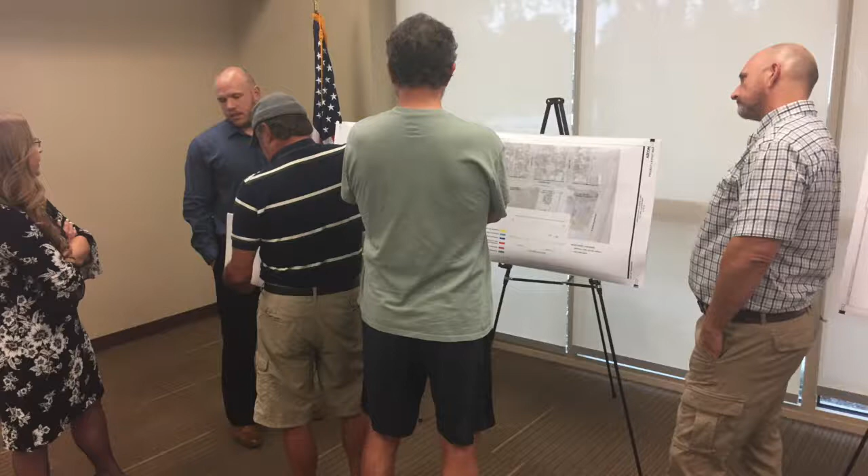So the first one is Tehachapi Boulevard. We're calling it the Tehachapi Boulevard ADA Reconstruction Project. I will tell you guys, grant writing, I've done a lot of grant writing for the city of Tehachapi in the last 14 years, is all about telling a story, and telling an effective, truthful story about what a situation is.

As you guys know, we just built the bike path here on the north side of Tehachapi Boulevard. We've done all kinds of public street improvements up to Hayes using ATP, or funds very similar to ATP, and we've also done Snyder over to Dennison now. But this one piece here from Hayes to Snyder has been missing, and it's pretty beat up.

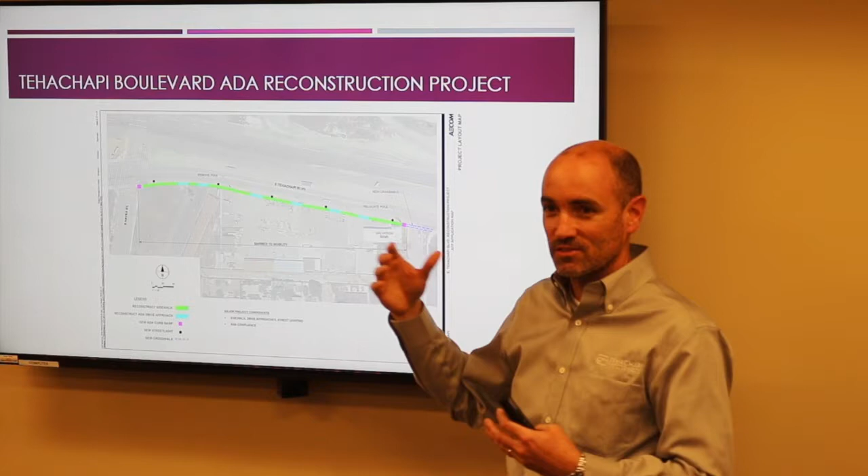There's a lot of power poles and different features that prohibit somebody in a wheelchair from making access. It just so happens that our number one location that receives a lot of pedestrian and disabled visitors, the Salvation Army, is right in this stretch. There isn't even a handicap ramp here on the corner, and that's the target of this project.

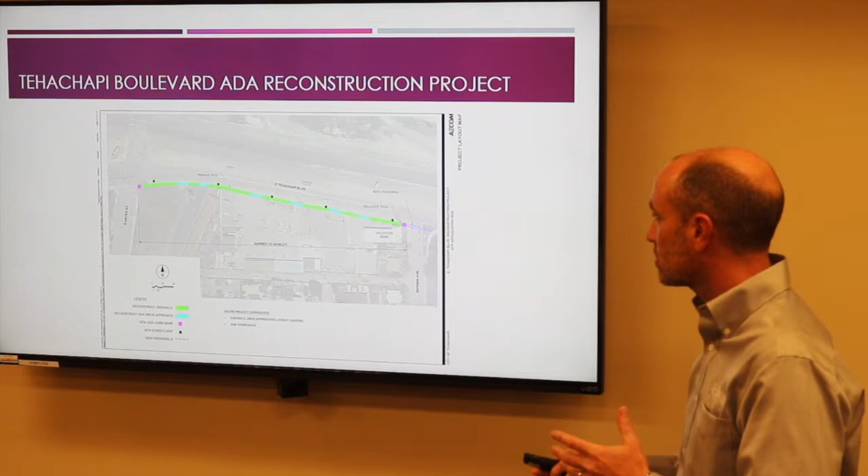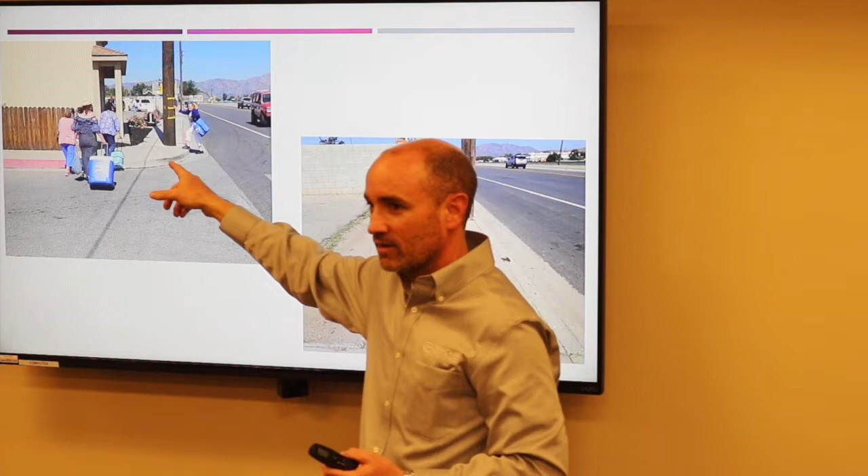And here are a couple of photos for you. These are grant writing gold right here, because they illustrate our point, and pictures do so much better than all the words we can write about it. A person of limited mobility who's literally having to lean on a telephone pole to get up the curb, or people rolling boxes who are going to have to pick those up and may not be capable of picking them up.

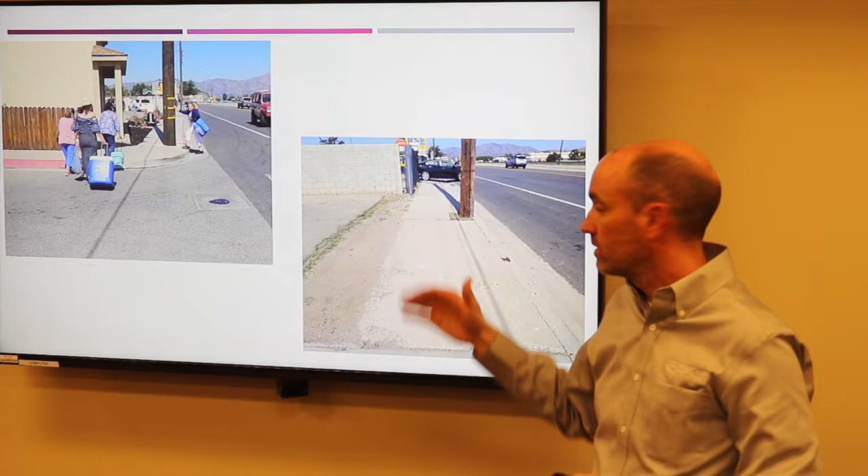Sections where if you're in a wheelchair, this is pretty difficult to navigate, or if you have low vision, this would be difficult to navigate, in addition to it being in pretty poor quality.

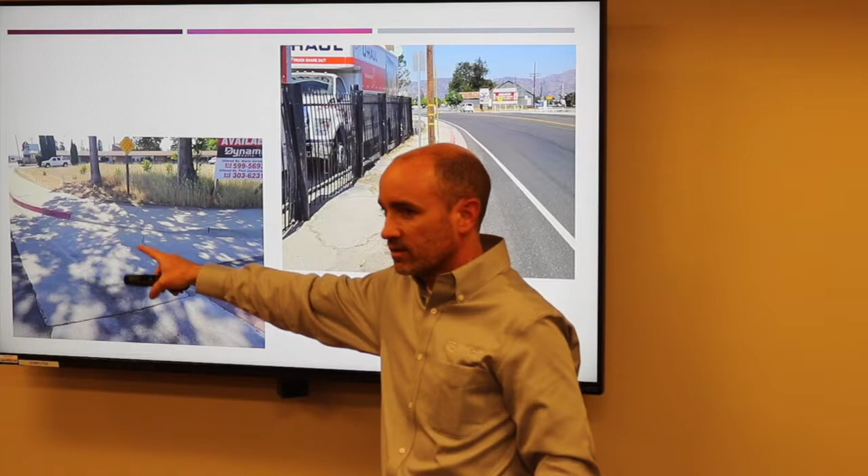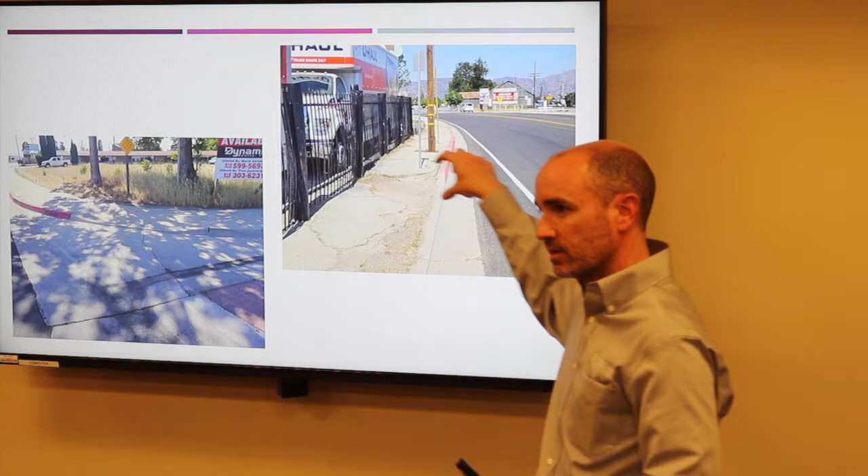Yeah, real poor quality. This ramp isn't even close to compliant. I know it's a ramp, but it doesn't meet current federal code. This kind of stuff, even this, is not compliant anymore. So all that kind of standard driveway is no longer compliant. That's why when you see us build a new driveway, we build sidewalk behind it, because that's required to keep it compliant.

So this is a great project in our opinion. We think it's also helpful to target a certain dollar amount when you do these. When a little city like Tehachapi goes after a $5 million job, we don't usually get as much support, because the people who review these are looking for LA City to ask for that kind of money. So this is a really good gap closure project for us, and we think this one's got a good shot.

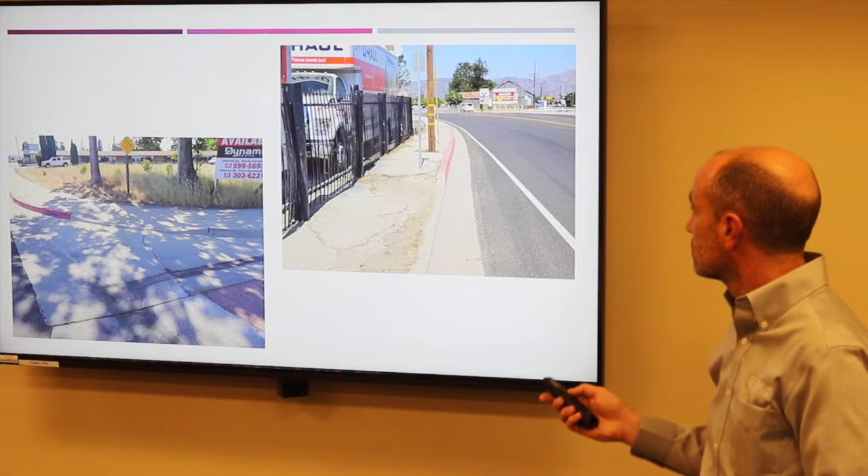So the next one is West Park frontage. This is one where we really feel like the skate park's here, and you literally have no way to get to the skate park without crossing the street, probably in an unprotected location. If you cross down over here where there's an intersection, there's not an effective or completed sidewalk between there and the skate park. So the odds are the kids are skating down here and then jaywalking or skating across the middle of the street to get to the skate park.

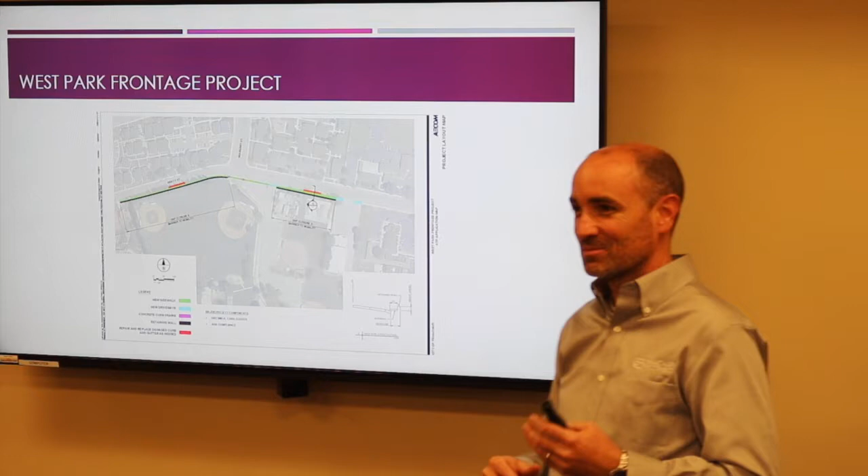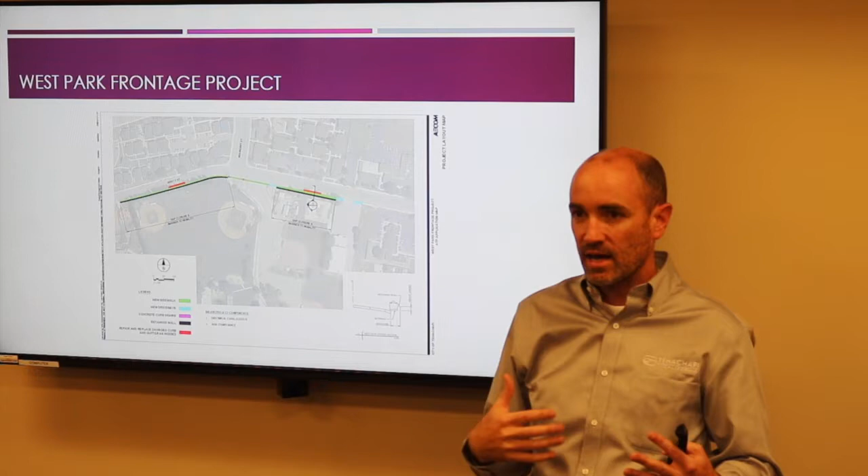Or when Little League is here, this place blows up and people are everywhere. Frankly, when there are a lot of kids and adults distracted, kids have the habit of being distracting - and you parents, I'm speaking the truth. So this is a really valuable piece for us, to allow somebody to park along here, shuttle their kids immediately to the sidewalk, and have a nice, clean, straight shot access to the park. That's the basis of this one.

These photos give you a sense of the quality of the infrastructure in that area, or the complete lack of infrastructure in this area.

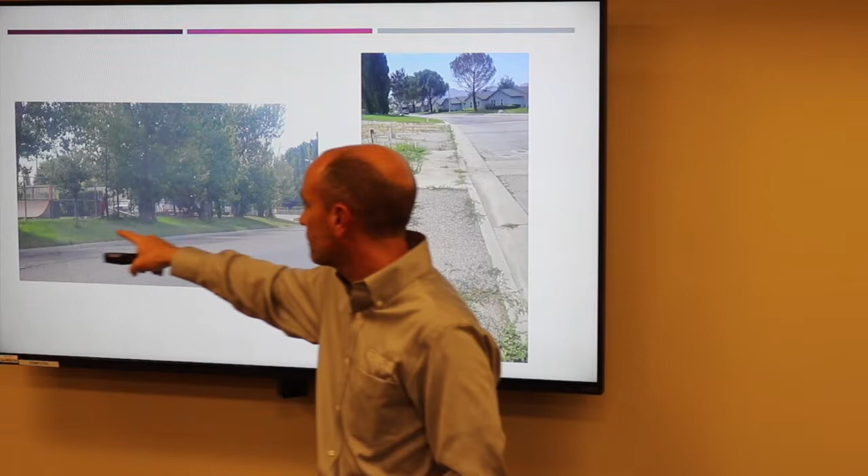When we build this, we are going to have to build a little retaining wall to deal with that slope difference, but that's frankly not that difficult to do in my world. Here's another picture, a couple pictures of it to show you what I'm talking about.

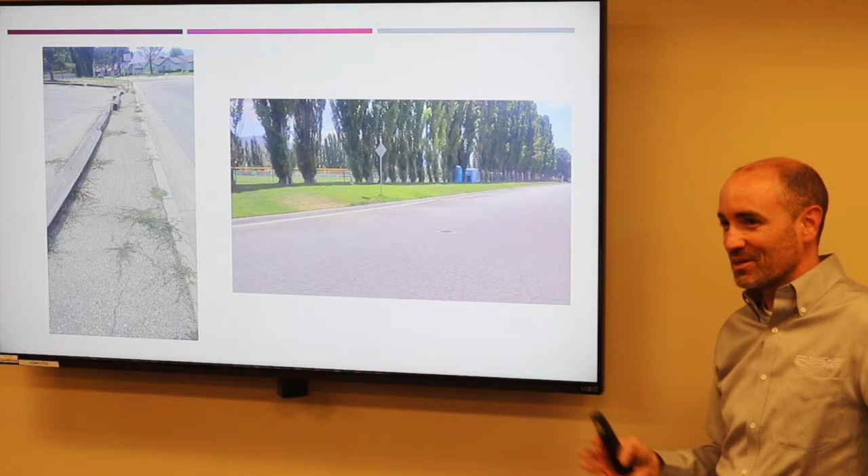While grass works for most people, it certainly doesn't work for a person who's disabled, and it's not always great for little kids, because you never know what they're going to do. Nice straight sidewalks tend to be your best bet for keeping kids where they belong, at least while you're shuttling them in and out. So that's the purpose of this project.

The third one we're presenting is the Dennison Road Gap Closure Project. We've already succeeded in receiving ATP money for this area, where we completed sidewalk down Dennison and then down Anita to the front door of Tompkins. That allowed us to access the neighborhoods that lie south and west of these two schools.

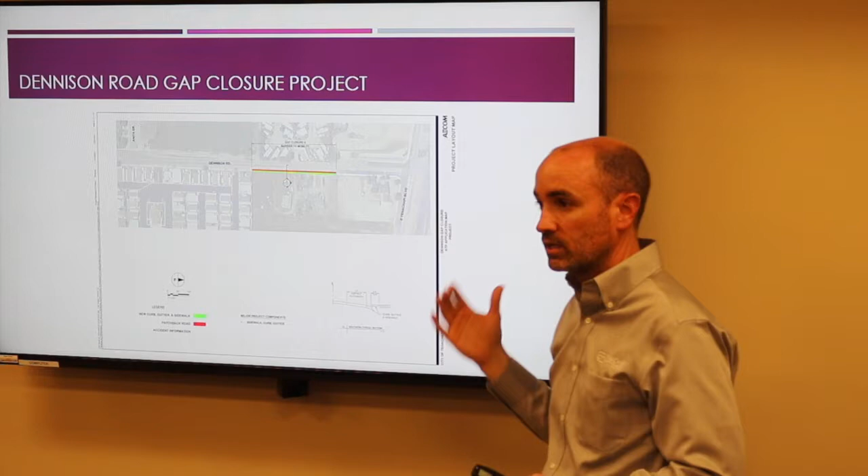But we do have the neighborhoods to the north. The ATP project I mentioned earlier, where we did the big improvements to the rail crossings, is going to make major improvements to the Dennison overcrossing, including continuous sidewalk the entire way. So if you live in Ash Tract, you would have a complete continuous path here. And as you all know, we did some major improvements through here as well.

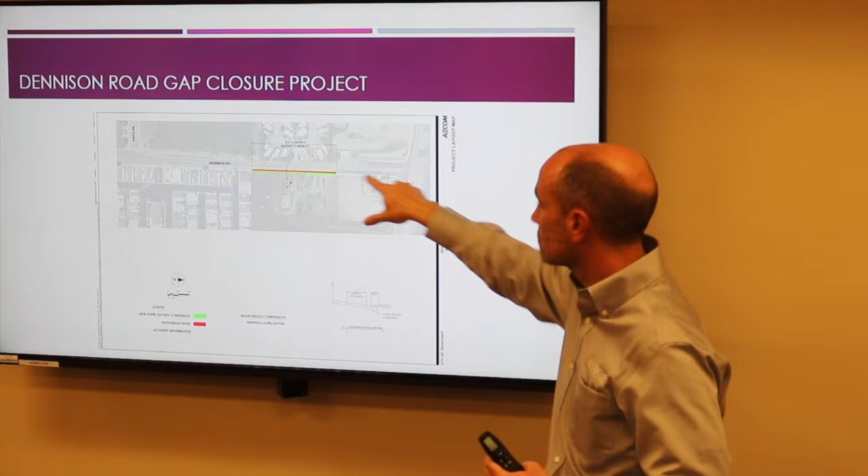So we are missing this gap. On one side of the road, we have the mobile home park that narrows the road with no path of any sort. Even though you can walk in this ditch area, it's like 3 feet wide between that and the edge of the road. It's dirt, so it doesn't work during adverse weather, and it's kind of unsafe during any weather, being that tight.

The other side of the road has plenty of room, that's this piece here. And kids do walk it, but again, there's the adverse weather situation. This is a small project in our world, a very small project, and it allows us a great opportunity to make a primary link. So the proposed project would be sidewalk through here and then finishing the pavement out to make it clean and tight.

Is that going to be a Class 2 lane on Dennison? Yeah, we would probably have room for it. That's actually a very good thought. We might consider adding that to the narrative, guys.

All the way up to Highline? I don't think we can get to Highline because we don't have enough room south of the school. But you could do a Class 2 to the edge of the school and then do a Class 3, which is a shared bike route up to Highline.

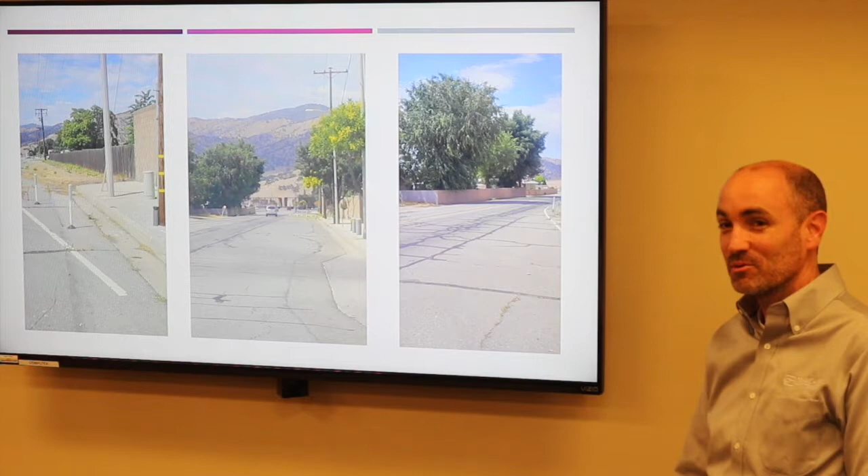So that's this project. Good, very good feedback though. Let's consider that team when we get back to the office. Just to the 4 projects we're proposing this year.

This is the Snyder Avenue Gap Closure Project. We have pieces of sidewalk largely in front of the existing school, in front of JMS and in front of their facilities. This is the Mormon church here, but we have limited access here to connect the school to JMS. One of the most important things is we have a completely porous set of improvements on the west side of the road.

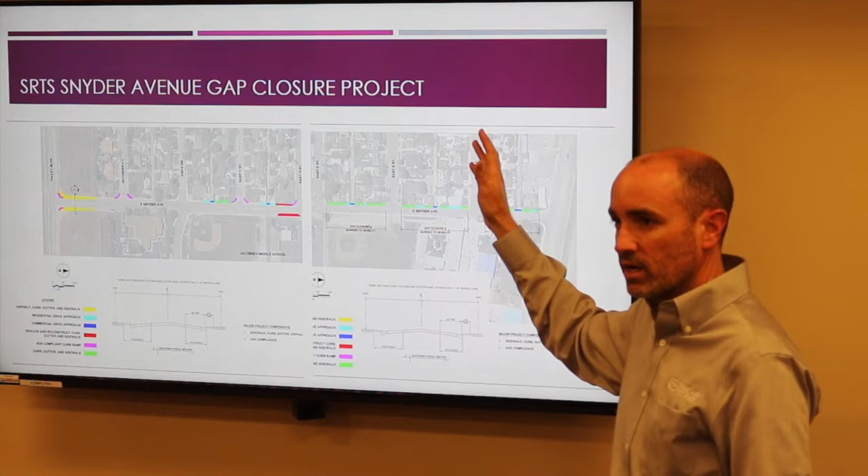So does everybody know where this is? I'll show you a photo, it's easier than showing you this. This is the west side of the road, and we have extensive pedestrian traffic on that side. The kids are dancing in and out of these cars.

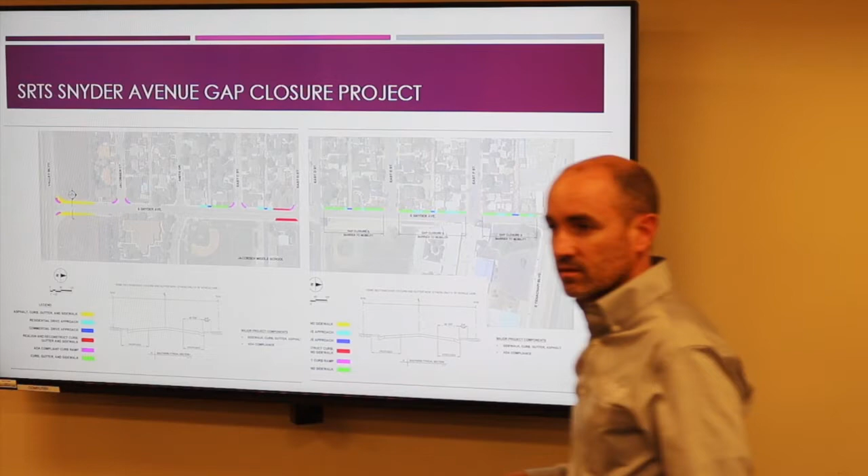This is a major route for everybody that walks to the middle school, and the reality is all these neighborhoods feed into it. Moms pushing strollers are in the road, and kids on skateboards just dart across the street. D is the primary controlled intersection where kids cross from that side onto the school property.

But you can't see coming out of the driveway because of the pump and the brick wall. You can't see it. I don't have a picture of that one. Yes, this one. I'll show you what we'll do about that. When you come out of that driveway, you can't see it all.

The whole point was to give folks coming through the neighborhood this direction, or from the Hayes crossing to the north, a path. If you live in the neighborhood north, you probably walk across the Hayes crossing, then go on to our bike path, through the park, and then down D Street.

So anyway, the whole point is to try to finish it up and clean it up, again making our schools more attractive in addition to making it safe and comfortable for pedestrians, which is a big goal of the project. The desire is to get kids out of cars as much as possible, and make parents feel comfortable letting their kids walk to school instead.

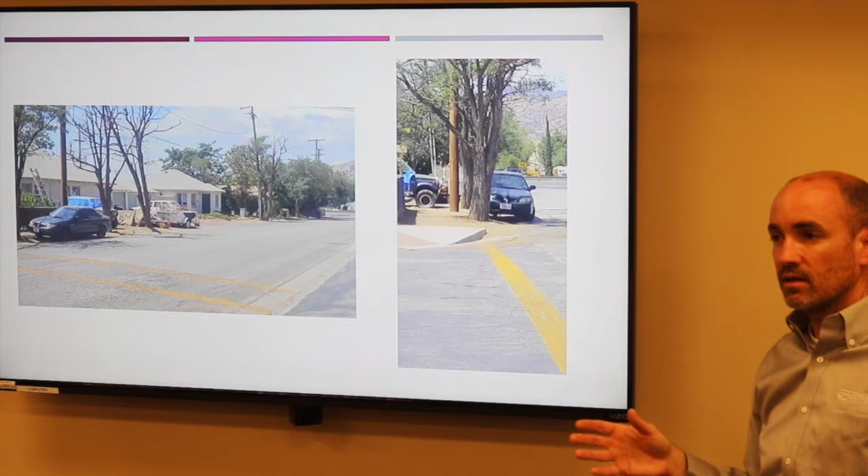And these kinds of moments, as a parent of a 13-year-old and an 11-year-old right now, are the kinds of places where I go, I don't think I want my kid walking here, or I'm going to drive instead. And that's okay, but the goal is to get them onto the safer route.

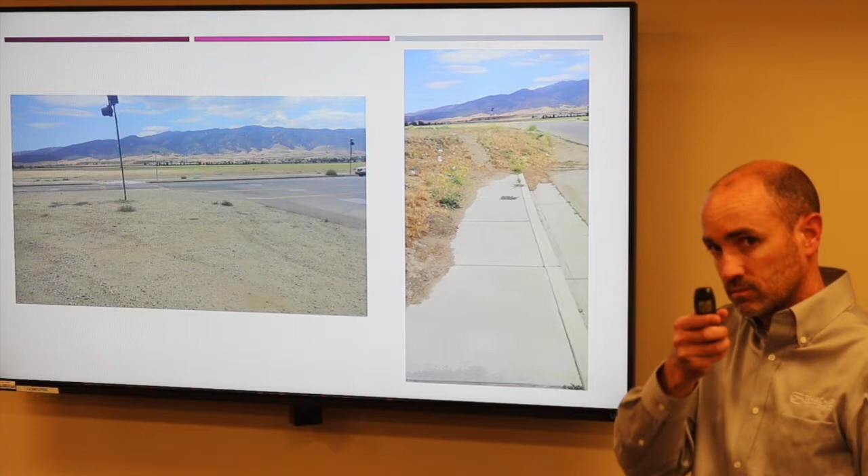There's a lot, you'd be surprised how many people walk from up by Anita and that area down to the Salvation Army to get food and pull their carts. You may want to add that to the narrative. That's a very good point. I see them going north on Snyder all the time in the street.

So one last comment, and then we're done. The pump is right here. For those who've driven this, there's a well here, and the road offsets in width through this intersection. Years ago we striped this area to try to get motorists to shift over and clean up sight lines, but stripes only work on people who are paying attention, not on the people you're most trying to control, the ones who aren't paying attention. So part of this project would include actually bulbing out this intersection with physical curb, gutter, and sidewalk to fill that in. That, like you see downtown, has a very good effect at funneling cars to where they belong and separating them from pedestrians, bicyclists, or parked cars.

So we're paying attention to those kinds of things, and I think this is a great project. I think with that, that's the end of my presentation.

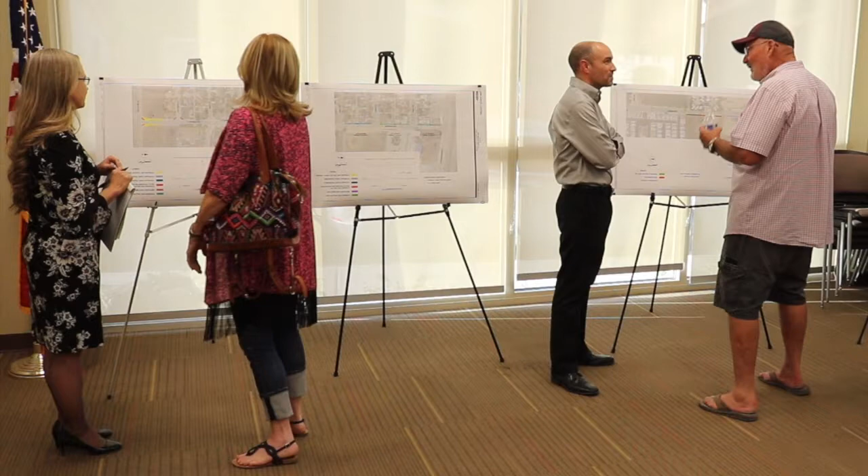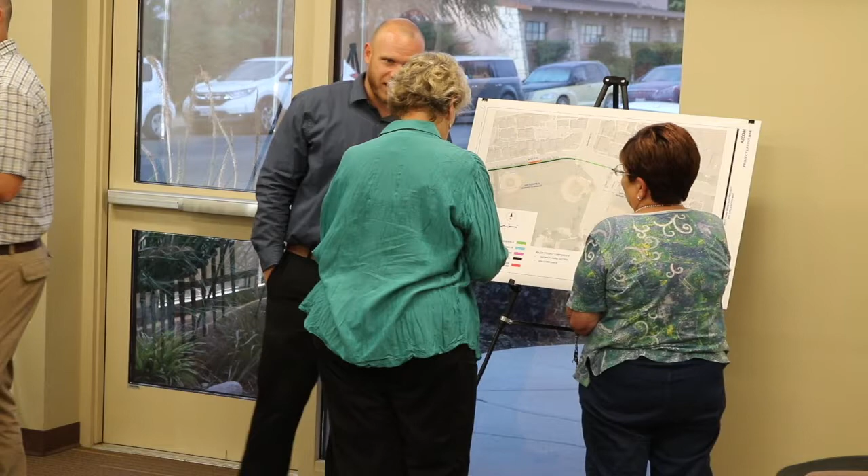Well, we're working our way through the streets one at a time. Yeah, I know, I appreciate that. No, that's exactly what I wanted to hear. And if you guys ever identify any specific spots repeatedly used, where you have to park to get to this business, those can really help us if we know the specifics.

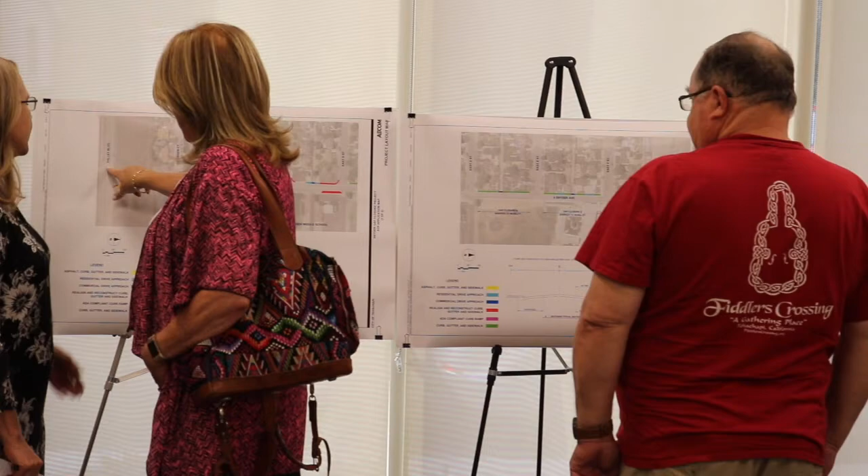And we've spent a lot of money downtown. Hopefully that's pretty accessible to you guys.